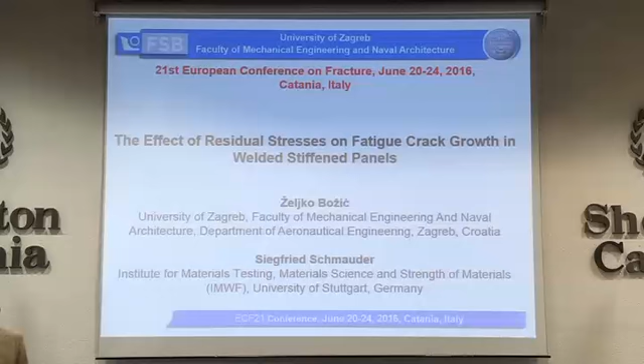Good afternoon, dear colleagues. It's my great pleasure to be here today and to present our results on fatigue crack growth modeling in welded stiffened panels considering residual stresses.

This is me and this is my colleague from Germany, Professor Schmauder. We had a common project and produced this work, which I will present here today. I also wish to thank my former students—I mention just three here, but many more were involved in the many steps that led to what we have now, because it's an iterative process that needs validation and evaluation. Now we have something I think is worth presenting.

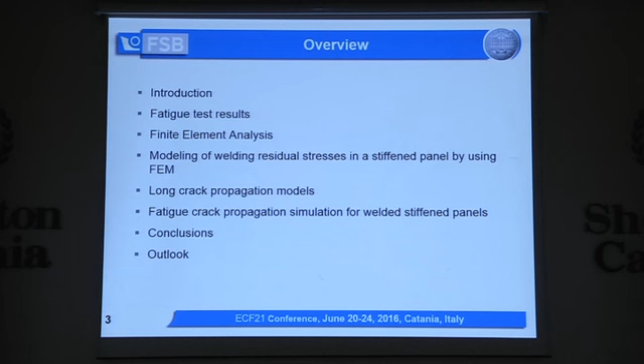So first, I will give a brief introduction, then present fatigue test results, and then describe finite element analysis and modeling of welding residual stresses using the ANSYS program. Then I will present some long crack propagation models and apply some of them to our experiment, comparing experimental and simulation results. We'll draw some conclusions and give ideas for future work.

Before we start, I'll mention this systematization of total fatigue life, given by Schijve in his book: we have an initiation period, then long crack growth, and final failure. What we consider here is this part, where cracks are already long, and we take into account residual stresses. Without residual stresses it's fine, quite straightforward, but residual stresses may significantly influence fatigue crack growth rate and propagation.

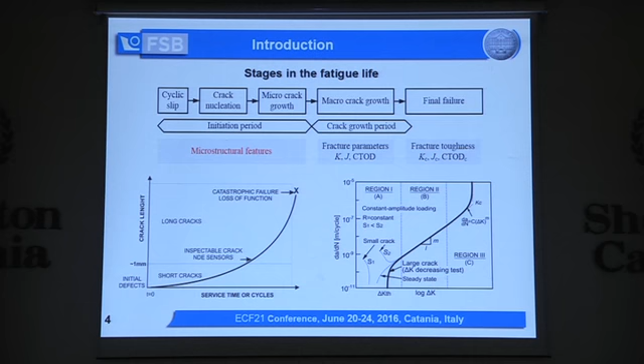When we don't have residual stresses, this is typical crack growth behavior: at first we have slow, small crack growth rates, and then crack propagation speeds up. So for a simple plate without residual stresses, we have this situation, but residual stresses may change this. With our model, we are in the Paris region, and we'll apply power law models like Elber and Schijve.

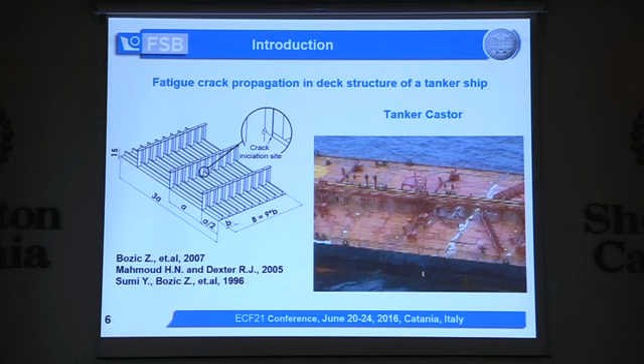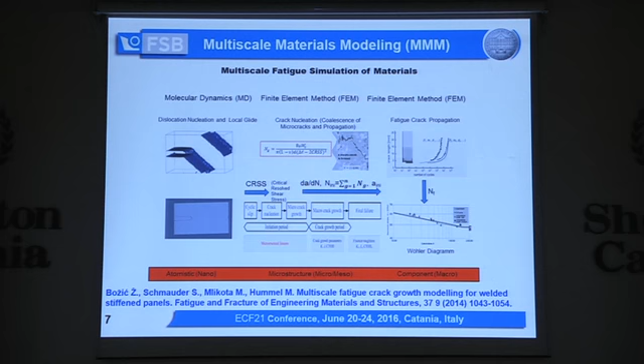So this problem is basically a multi-scale problem, and in total fatigue life, as Schijve mentioned, all stages should be considered. But what we present today is propagation of long cracks, so this part here, and we consider the effect of residual stresses.

To mimic what we have in a deck structure of a ship, this situation here, we designed a specimen which looks like this. It's a plate with welded stiffeners, and here we have a cut stiffener and a crack already in the plate, and it looks like this.

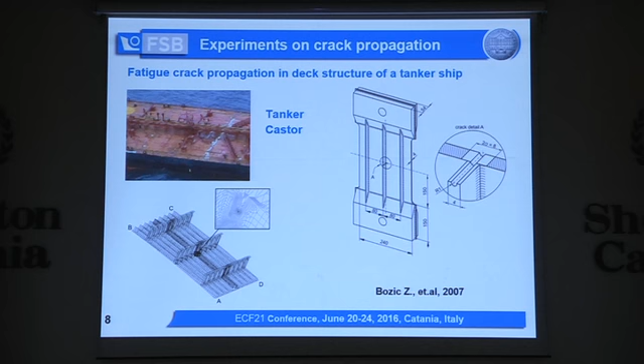So we consider basically two situations: when we have a single crack damage, and three cracks at each stiffener. Today we speak more about this, but we'll show experimental results for both cases. A simple specimen with a single crack, SP1, was considered, along with one with three cracks, and the material consideration is...

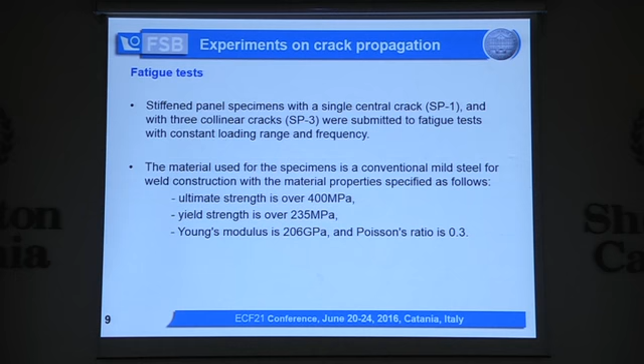...mild steel for welding with yield strength 235 megapascals, and this data, as you see here, is typical for welded ship structures. The specimen looks like this, with this cross-sectional area, and it was loaded with delta sigma related to the intact area of 80 megapascals.

For that, almost an equivalent 10-ton cyclic loading was needed. This is the R ratio, which is basically close to zero, just a little bit above, to avoid shocking in the experiment.

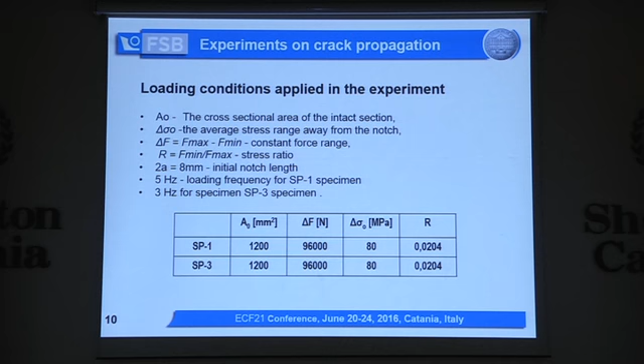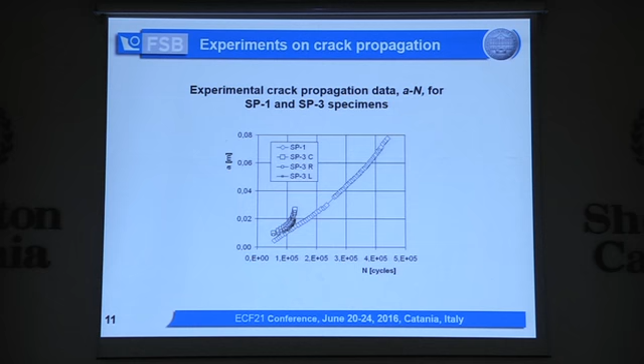For the specimen with one crack, welded specimen, this is the fatigue life, and for the three cracks it's much shorter, several times shorter. What we can see here is not what I showed you before—it was propagating like that, and now it's propagating probably at the same crack growth rate. This is what we wanted to investigate, to see what was the reason for this.

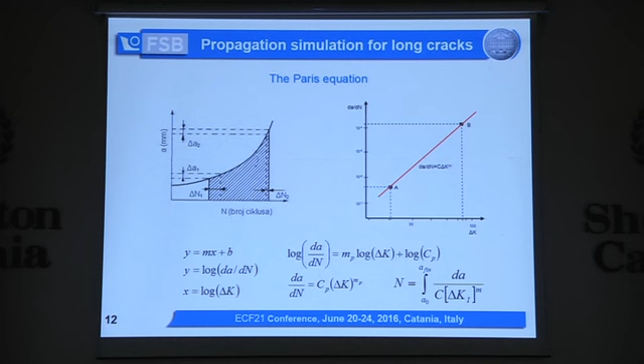For that we use a power law—a typical power law is the Paris equation. As you know, in logarithmic scale, in a crack growth rate diagram of da/dn with respect to delta K, we have a straight line, and with some simple mathematics we arrive at the Paris equation. This equation was produced by this old man, who is walking around here, about 50 years ago. Then we can calculate the number of cycles from this equation by integrating the Paris equation.

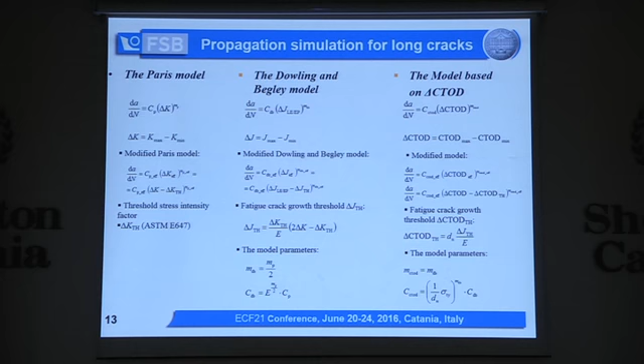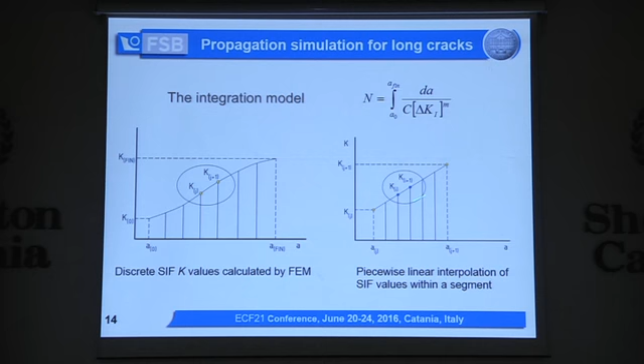We started with the Paris equation, but today we have like 8 different power law models, and even more. I'll mention some of them, since we use two others which you'll see later. We integrate the fatigue crack growth law using a numerical simulation procedure developed in MATLAB, with piecewise distribution between discrete points, which we then integrate numerically to get the fatigue number of cycles.

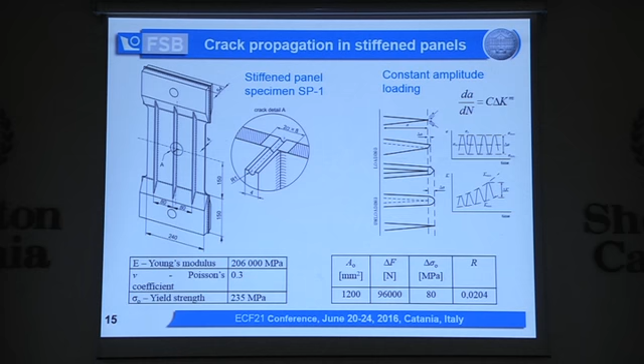Now back to our specimen. We consider this one with a single central crack. This part is intact, and here is the crack. The cracks look like this, and after 500,000 cycles it was broken.

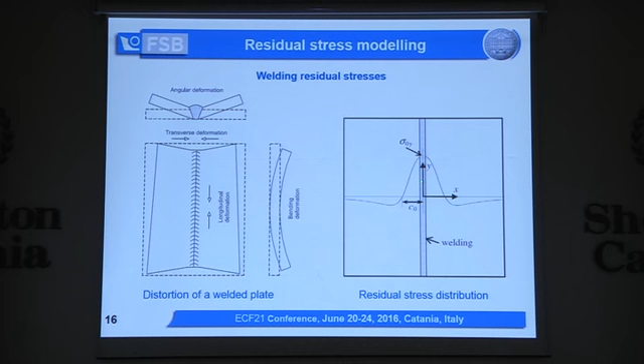What we want to see is the influence of residual stresses on fatigue crack growth rate. If we have a welded plate, this is a typical residual stress distribution in the longitudinal direction, where here we reach or may even exceed yield strength, and this area makes equilibrium with the area where we have tensile stresses and compressive residual stresses. The well-known function for this is the so-called Green's function, an analytical expression.

These two areas, below and above, are equal, and we can introduce residual stresses into our finite element model using ANSYS and the INISTATE command. For that, a certain fine mesh is needed, and with a 1 millimeter element size, we could do this successfully.

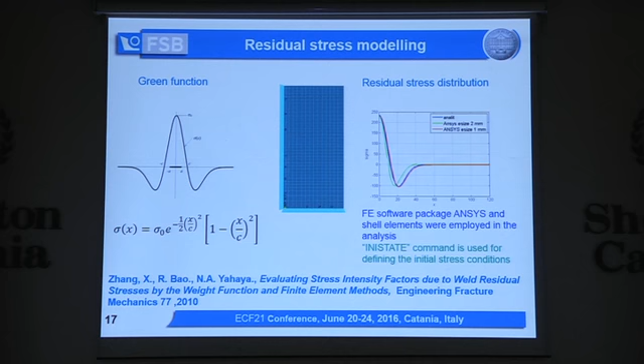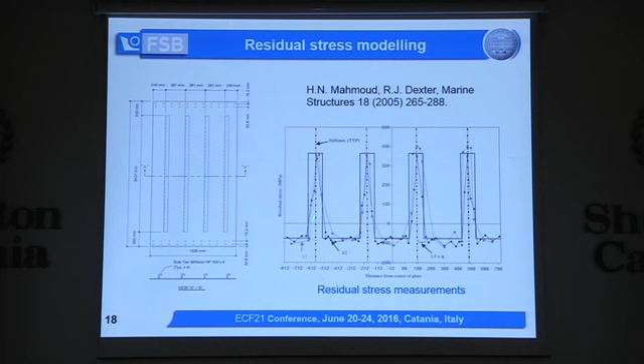So we assume in our model this residual stress distribution, because it should be idealized - it's more or less random, but it's always like this. I want to point out that the real distribution is between rectangular and triangular.

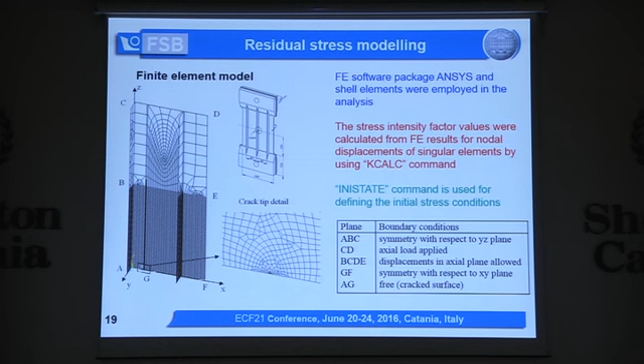We introduce residual stress into our stiffened panel and calculate the stress intensity factors without residual stresses and with residual stresses. At first we consider rectangular, with residual stresses introduced here, then we calculate the stress intensity factor - this is without residual stresses, and this is including residual stress. You see that at short crack length, with initial crack length of 2.8 millimeters, it's much higher due to residual stress, and here it's lower.

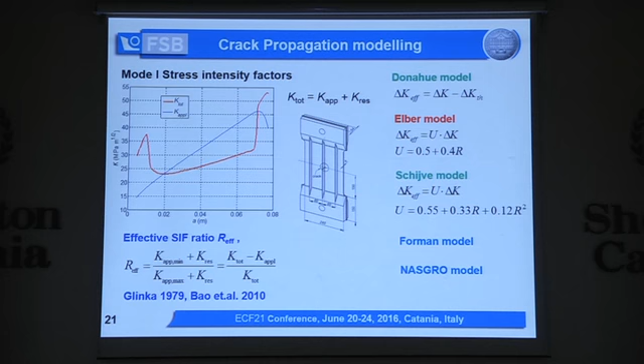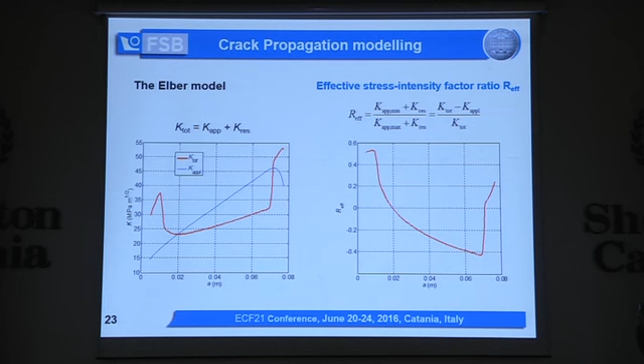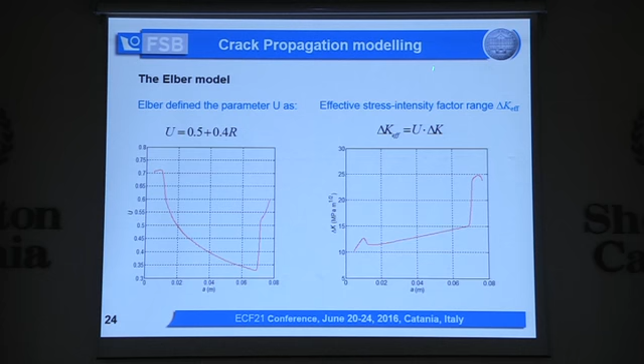We use these K values to simulate fatigue life, using the Elber model which you know well from the literature. In the Elber model we need the local R ratio, which depends on K maximum and K minimum, and the U function depends on this R ratio. Then we have effective stress intensity factors, and as explained before, by integrating the Paris equation with this delta K effective, we can simulate fatigue life.

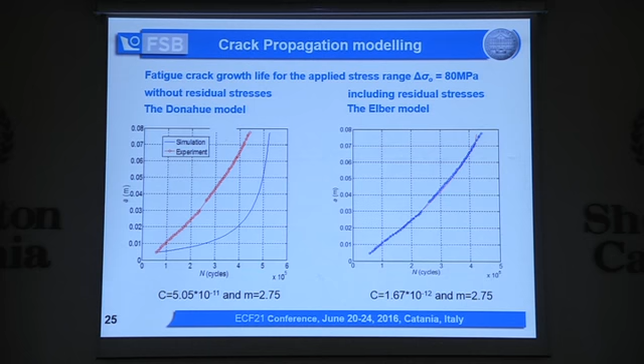Without considering residual stresses, we have this, what we've seen before. With residual stresses considered, the simulation fits quite well to experiment - maybe even too well, too good an agreement. So we consider some other distributions and models to see what happens.

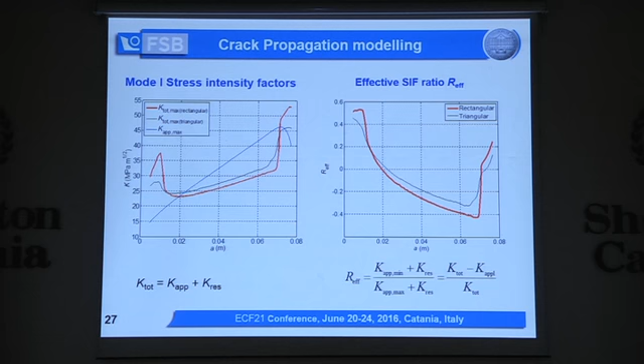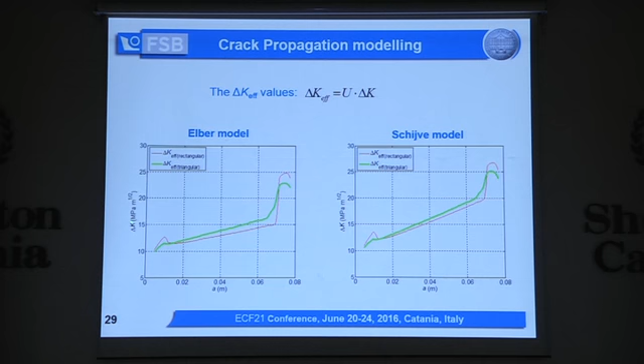Two extreme cases are rectangular and triangular. We calculated K again for both rectangular and triangular cases, needing R effective for both. Then we need U functions for the Elber model and the Schijve model, which we plot here, and finally we get K effective for rectangular and triangular, using both Elber and Schijve models.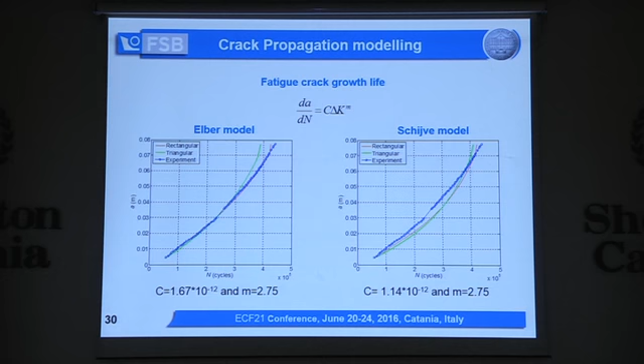We again compared simulated life with experiment. Basically all these models give quite good agreement with experiment, much better than without considering residual stresses, which would be something like this, what we've seen before.

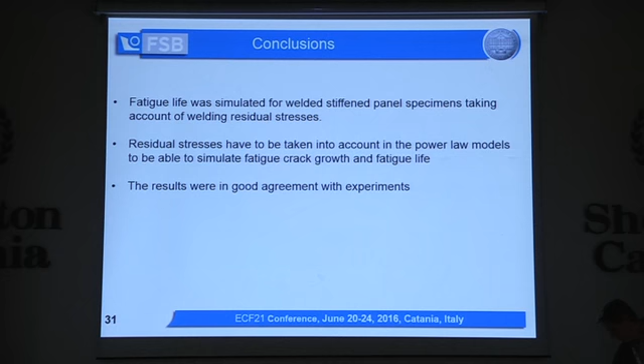So I come to the conclusion that it is very important to consider residual stresses in fatigue crack growth simulation in welded stiffened panels and other welded structures as well. Maybe we can also consider secondary bending in the future, and consider some more power laws for this.